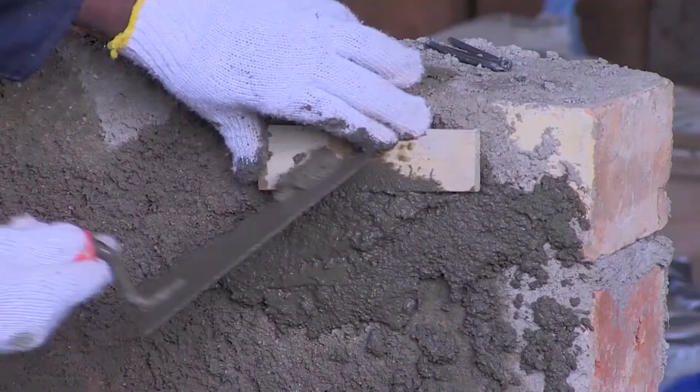I'm Trainer Gerard from Masonry, and we are going to learn about steelwork. Today, we are going to perform a footing with a sub-column steelwork. Dear learners, I encourage you to follow this lesson, and you may take notes if necessary.

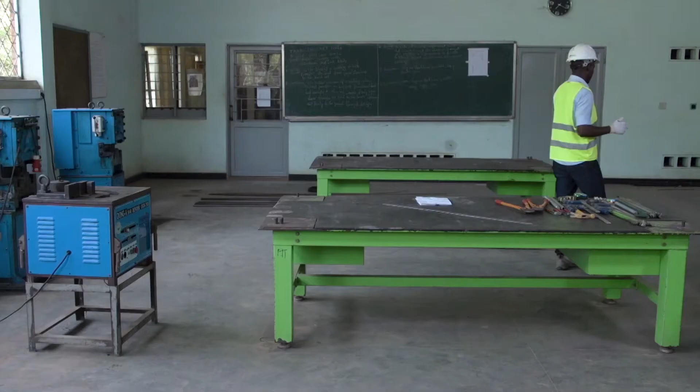The work we are going to perform is this one. Here we have a plan of our footing and sub-column. We have a section XX. We have the reinforcement perspective, the finished column in perspective, and a cutting list.

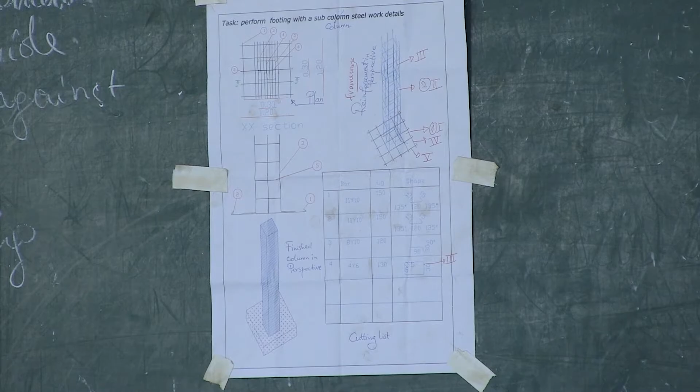The work we are going to perform has steps, step by step. Step number one is selection of tools, equipment, and materials, and preparing the workplace. So number one is selection of tools. Here we have different types of manual steel bar benders we use for bending steel bars.

We have different types of clamps we use for fixing something. We have pliers, which we use for tightening the binding wires. We have the bolt cutters we will use for cutting the steel bars of 6 mm diameter. We have a pipe bender we use for bending, and also the tape measure we use for measuring the length.

We have marker pens, and we will use them for marking. And also we have the chalks we use for marking. We have a tape ruler we use for measuring the distance.

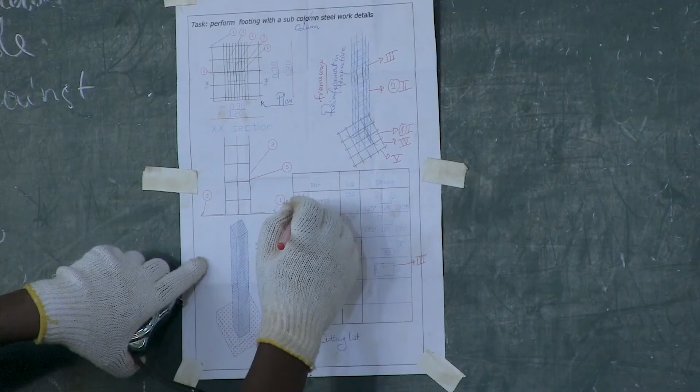Let us go to step number two. Step number two is marking and cutting of steel bars in the different dimensions. According to our drawing, we have a cutting list. Cutting list number one: we are going to cut the distribution bar for a footing. We have 11 pieces of 10 mm diameter of length 150. Let us mark and cut the distribution bar for footing.

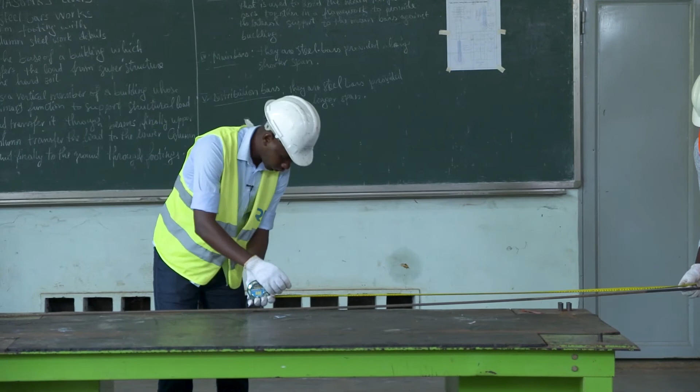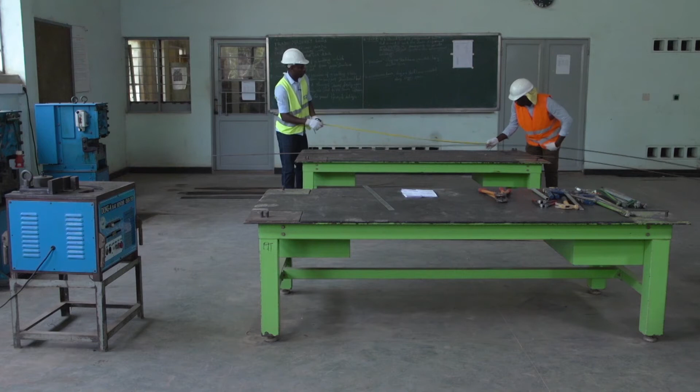We need 11 pieces. We need to mark 150. 150 is here. So we have marking number 1. Let us go to marking number 2. 150. Remember, we need to mark and cut 11 pieces for the distribution bar for footing.

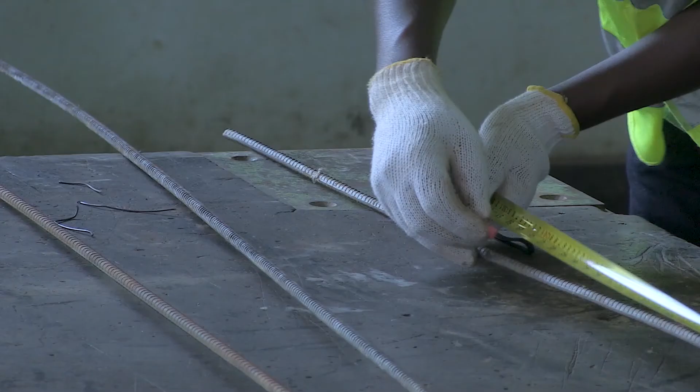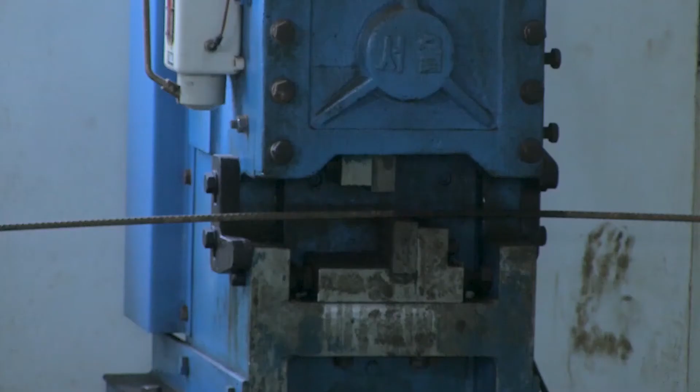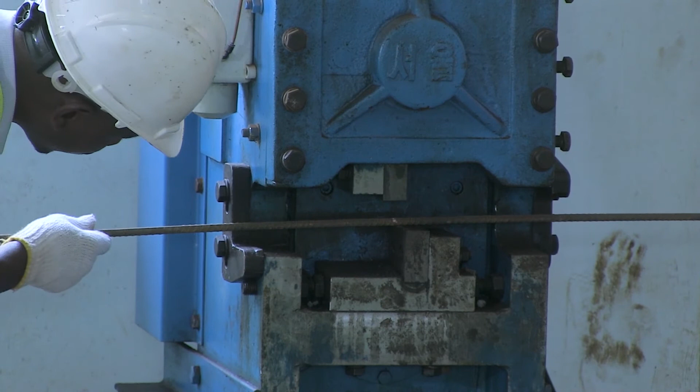Now we are going to cut. For cutting, we will use this steel cutter machine. Switch on the main source and switch on the machine. The machine is okay, it is ready. Then we are going to cut. So these are 11 pieces cut for the distribution bar for footing.

Next, we are going to mark number 2 on the cutting list. We have 11 pieces of 10 mm diameter for the main bar of the footing. Now let us mark. Here we have 8, 9. Here we have 10. And the last one, 11 pieces. We have finished marking 11 pieces for the main bar of the footing.

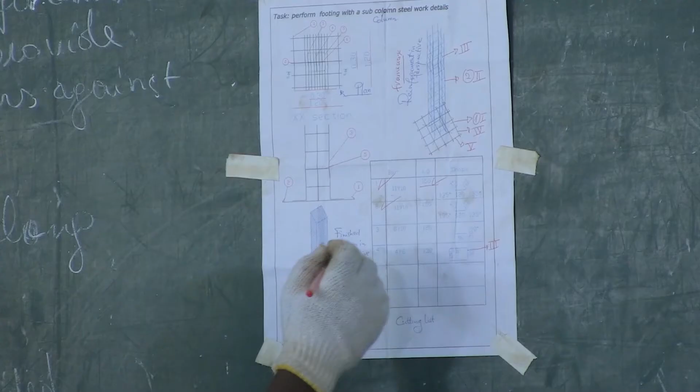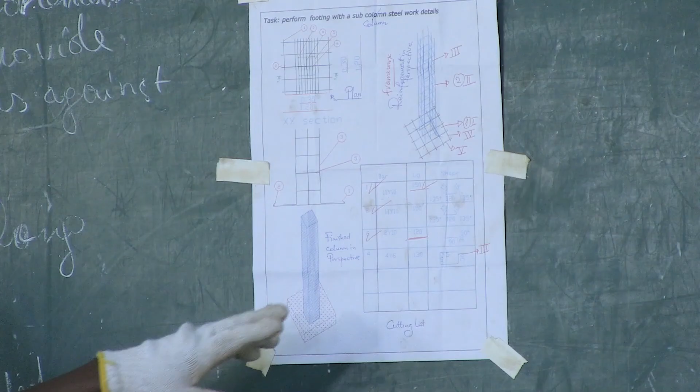On our cutting list, we have cutting list number 3. It is 8 of 10 mm diameter. We need to mark 120. These are the pieces of the subcolumns, because our subcolumn has 120. Now we are going to mark 120. Eight.

So now marking is finished. We are going to cut. Now we have finished cutting 8 bars for subcolumns.

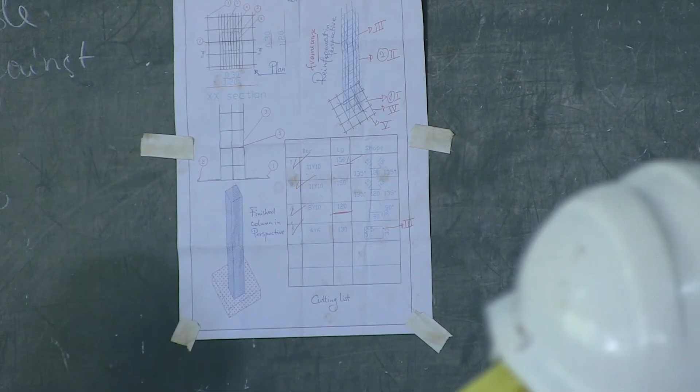According to our drawing, our cutting list has the last one, number 4. We need 4 pieces of 6 mm diameter of length 130. 6 mm diameter is this one. We use it for stirrups. We need to mark 130. So we finish our marking, then the next step is cutting.

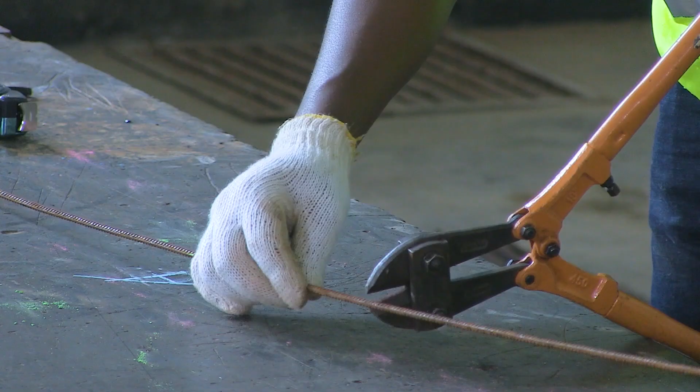Because it has a small diameter, we'll use this bolt cutter for small diameters. So we finished cutting the steel bars of 6 mm diameter. We use them to make stirrups.

Now, class, I think this session on selection of tools and cutting is clear. We'll meet for the next session on bending.